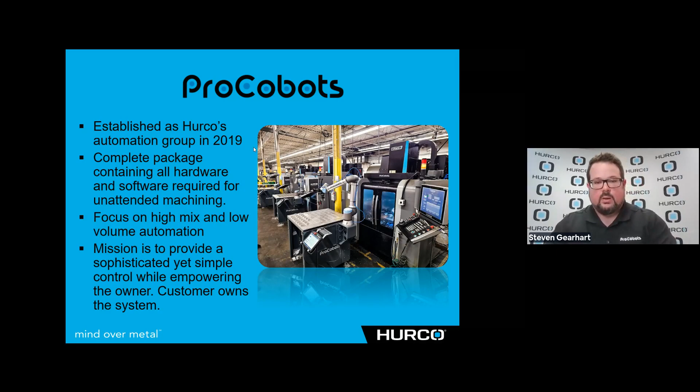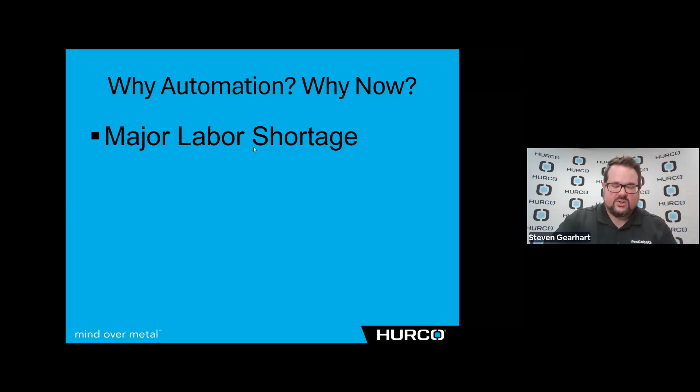So why automation? Why now? There is a major labor shortage out there. I'm sure a lot of you are aware it's really hard to find good quality workers, especially in small machine shops, especially out in the middle of nowhere. It's hard to find good workers. So we have the major labor shortage, and then right now the technology is ripe for small scale automation. The hardware is there, the software, it's all coming together at a head.

In order for us to really automate parts that we weren't able to easily or efficiently automate 10 years ago, for instance. And that leads to job shops no longer being excluded from automation. This is all obtainable now. It's no longer just large scale manufacturing, automotive, things like that—the pole barns that are job shops can now have robots tending machines.

So the first thing I'm going to focus on is the labor shortage. This slide just shows the worker pool, the population being from 16 to 64. This really just shows how in the last 70 years or so—45 years or so—there's been a labor surplus. Fast forward to today and in the future, we're really starting to see a decline in that availability of workforce, and there's no end in sight for that, to be honest.

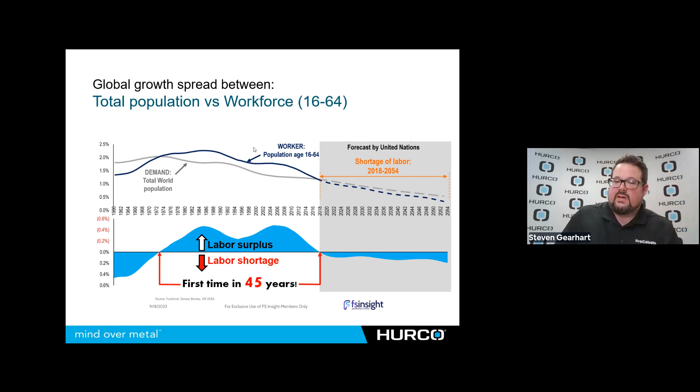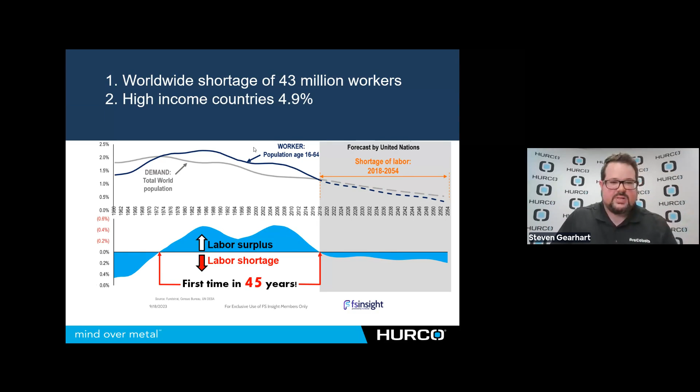So, like I said, first time in 45 years, there's been a global labor shortage. This is a worldwide picture: 43 million workers short. But high income countries like the United States are actually much worse off. If you look at this graph, globally we bottom out at 0.4%, but the United States is more like 4.9%. The exceptions are Africa and India, which level out this graph, where it should be a lot more extreme in places like the United States. So the takeaway is that automation is now driven by the labor shortage, not necessarily just trying to be more productive or cost containment.

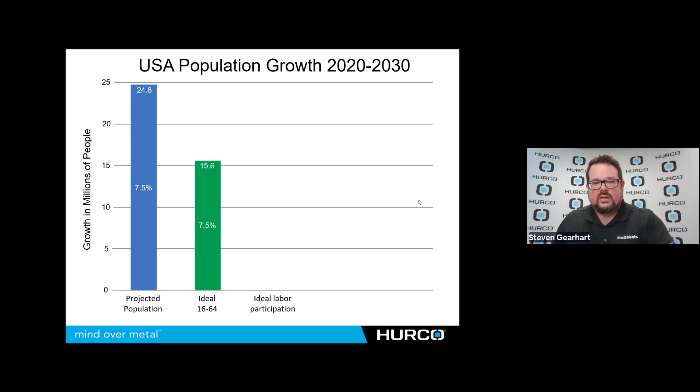This graph shows an expected 7.5% population growth between now and 2030. The ideal supporting workforce pool for that is 15 million, and 63% of that is the ideal participation rate, since not everybody available to work actually will. But here's reality: the projected pool of that 16 to 64 age group only grows 1.2%, and 63% of that projected to participate is only 1.6 million. So there's a shortage of 8.3 million people to support the population growth.

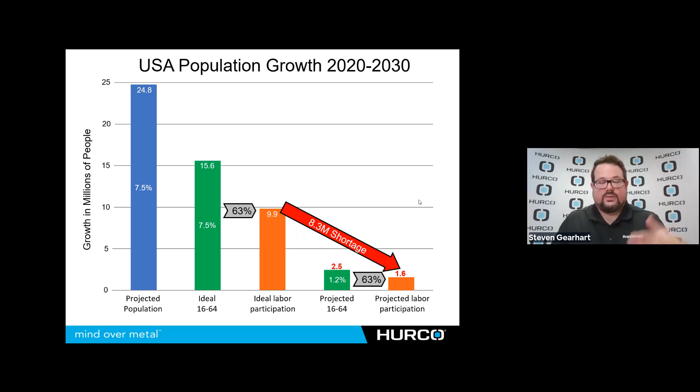So that's where robots come into play. So what is a cobot? A cobot is a type of industrial robot that is designed to work around humans, assist with tasks, be easy to program, flexible, and safe. Unlike traditional industrial robots, cobots are intended for human to robot interaction, making them ideal for small businesses with varied needs.

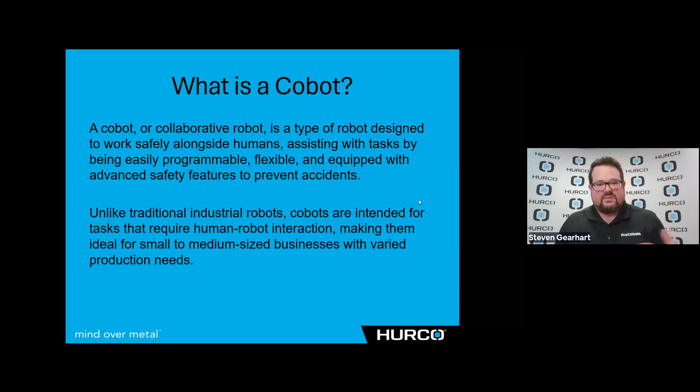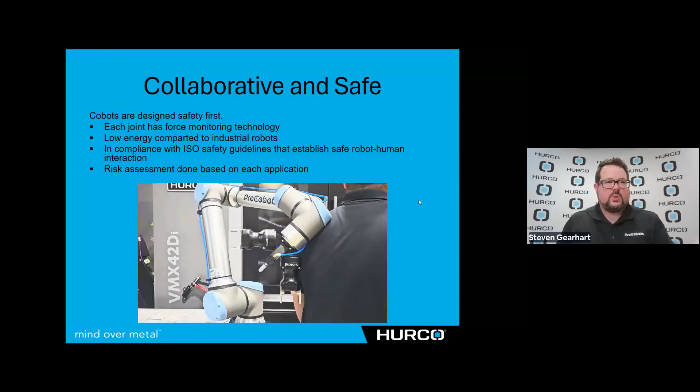So there's a video of me getting bumped by one of these robots. They're designed with safety first. Each joint has force monitoring technologies, and they're low energy compared to traditional industrial robots. They're in compliance with ISO standards and things like that. We do a risk assessment on every installation based on the application, depending on the part being held and other considerations. Obviously, if the cobot's wielding knives, we have to think a bit differently. But generally these things don't require area scanners or fences, which helps keep their footprint really small.

So just a quick comparison between cobots and industrial robots. I'd say they're both kind of industrial because they both have a place in industrial environments. A better way to compare them is that one is for high mix, being the cobot, and one is for low mix, being industrial. For flexibility, the cobot is really easy to use, whereas the industrial robot is highly specialized, designed for a specific task and purpose, doing the same thing over and over, a million times a year.

And like I said before, we're safe and approachable with the cobot. Industrial robots, not so much; you have to be a lot more cautious and guarded. The upside is that industrial robots are extremely fast, with higher payload. But with what we're doing with machine shop and machine tending, we're able to get away with less speed because most of the time the robot is just sitting there while the machine does the work.

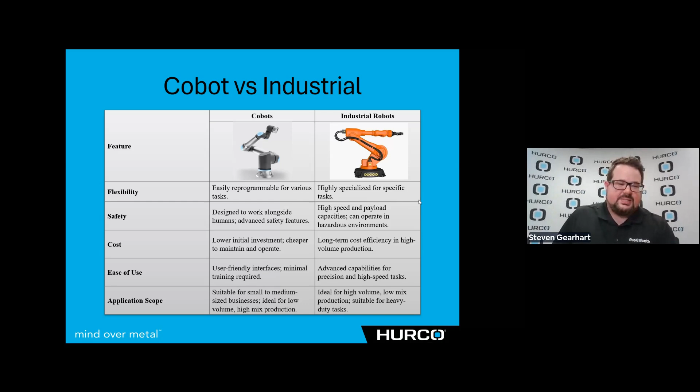We also have a lower initial investment with cobots, with quick setup times, which is really what we focus on. Whereas industrial robots are about long-term cost efficiency - you set it up and don't touch it for months or years as it does the same thing over and over. So you can calculate ROI with the cobot, and it pays for itself within the first year, especially with our systems. That's what we've really seen. And with the application, they're easy to use - it's really high mix versus low volume.

So back to these questions - second point, the technology is ripe for small scale automation.

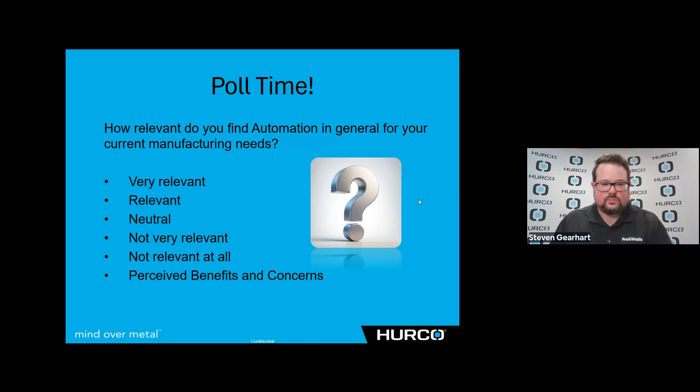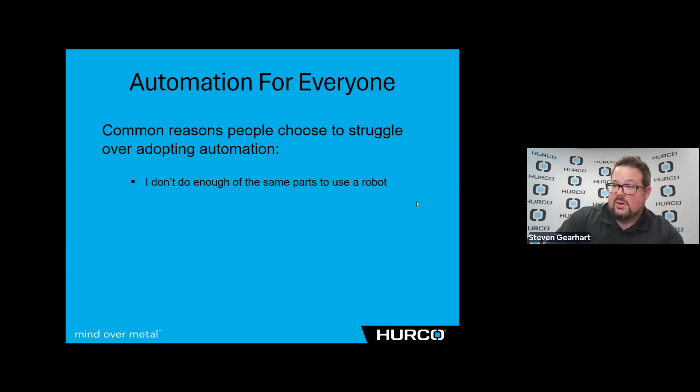Depending on your answers here, you may be asking yourself some of these questions. I hear a lot of common reasons why people choose to struggle over adopting automation. Some say, I don't do enough of the same parts to use a robot - and that's probably the biggest one. Traditionally, that would be true. With industrial automation, it takes a long time to set up, lots of money, lots of specialized programming, things like that.

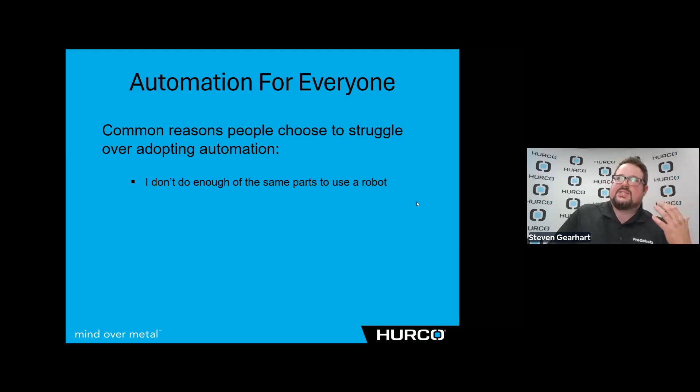What we focus on is really quick changeover. It's really easy to set up these robots now, to the point where in less than 5 minutes you can set up a part you've never automated before and have the robot at the machine. So now you have these small 1 to 2 hour batch sizes that are obtainable for automation. It's so easy to set up that those couple hour run times are worth the effort.

People say there isn't place in their shop for a robot cell. Traditional robots are huge, or they can be - taking up a lot of space with area scanners needing 3 meters of dead space around it, safety guarding, things like that. With the Cobot, because it doesn't need all of that, our compact table is about a meter square of space. So really, if you have room for an operator, you have room for one of these robots and the parts.

Can't afford to dedicate a machine to automation - I understand that completely too. That's what we've done with our system. I think most systems should have casters on the thing so you can move it from one machine to another. A big part of that for us is we have a quick connect to connect the robot to the machine, as I'll show you. That's really important because we want the system to be flexible. Maybe this machine is a 5-axis machine with a big part that isn't really robot friendly, and you want to run it manually. Instead of the robot just sitting there, you can roll it to a different CNC machine or out of the way to make it flexible. We really focus on that.

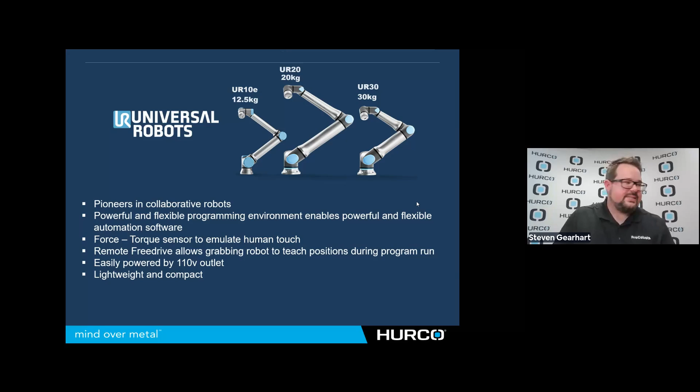So first we got to think about a robot. When we do automation, the first thing is the robot. We use universal robots for lots of reasons. They have a range of payload capacities now from 12.5 kilograms all the way up to 30, so we can lift a range of parts, large parts. They're the pioneers in collaborative robots. They have a wonderful programming environment which allowed us to make really powerful and flexible software. The force torque sensor at the end of the UR emulates the human touch, and there's no other robot out there quite like that. We can use this remote free drive that allows us to grab the robot and show it where to place the part - I have some examples of that to show you soon. It's easily powered just by a wall outlet, lightweight, compact. So they've been a great partner for us.

Next, where are we going to put the robot? We have these tables that we put the robot on. It allows us to present the parts in a nice, orderly fashion. We have 2 models that we really focus on for our machine tending application - we have the flat tray, which allows us to stack parts.

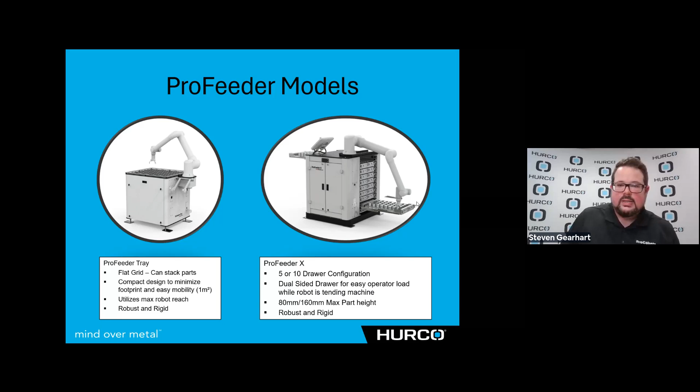Compact design, about 1 meter square, and it utilizes that robot reach so we get the most out of our work envelope. Then we have our drawer system for taller parts, or parts where you want high capacity but can't stack them. We can configure these between 5 and 10 drawers. They're dual-sided openings, meaning the robot can have 1 drawer open tending to the machine while the other 9 are available for the operator to load and unload. Depending on configuration, we can do parts 80 to 160 millimeters tall, and both of these are robust and rigid.

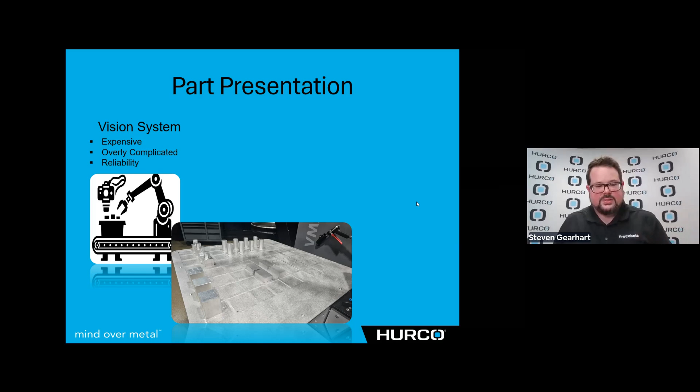So then we got to focus on part presentation. There's a lot of buzz about vision systems, and they've come a long way in the last couple of years, but it's kind of overkill for what we're doing. It's expensive, overly complicated, and as far as picking up a pool of different size parts, you can have issues with reliability when it comes to machine tending. So we don't go with vision.

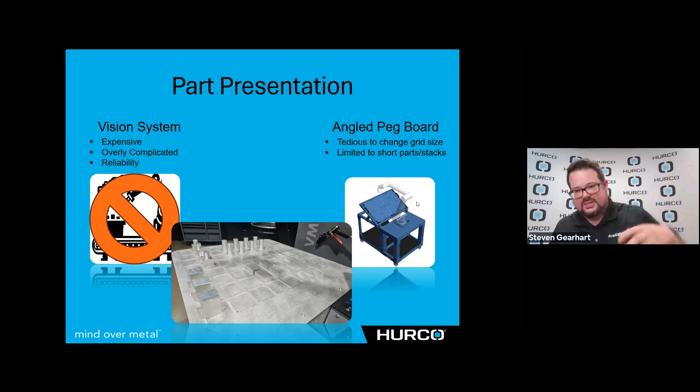Angled pegboards are a great solution as well, but I think they're tedious to change the grid size for different size parts, and you're limited to short parts, short stacks because of the angle. So we focus just on a flat grid, so we can quickly swap out those grids to have different size pockets for different size parts. It's simple and straightforward, and we can actually stack a large amount of parts with these, covering a large range of part sizes and heights.

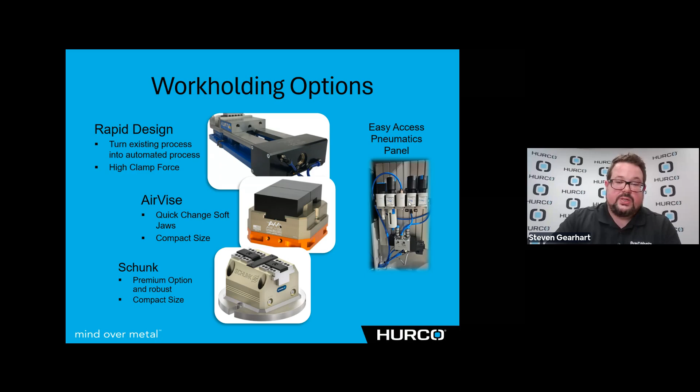We love using those. Then we have AirVise and Schunk for the smaller, compact soft jaws and hard jaws work holding. And we also have our pneumatics panel on the ProFeeder for ease of access to adjust the regulators, pressures, and things like that.

So then dual gripper options. We focus on the adaptive gripper from Robotiq, and then also pneumatic, using Schunk for that, and they both have their place. The adaptive gripper is really about, if you can use it, it's great because you have that programmable stroke, allowing you to pick up a range of parts.

So what I mean is you can have a range of parts, let's say a 1-inch part and a 3-inch part. Thanks to our software, you can queue and load those jobs to run back-to-back lights out, so it'll run 50 of part 1 and then 50 of part 2. With the adaptive gripper, you're able to pick up and adjust the fingers to different size parts, whereas with pneumatic, it's more either open or closed. You can have some positions programmed, but it's still kind of predetermined, and you can't just variably do it on the fly without some sort of manual interaction.

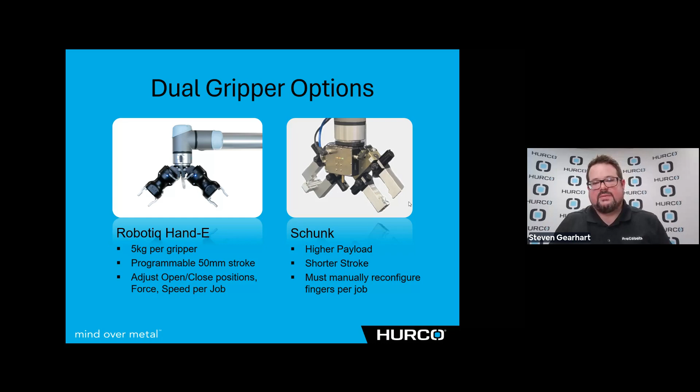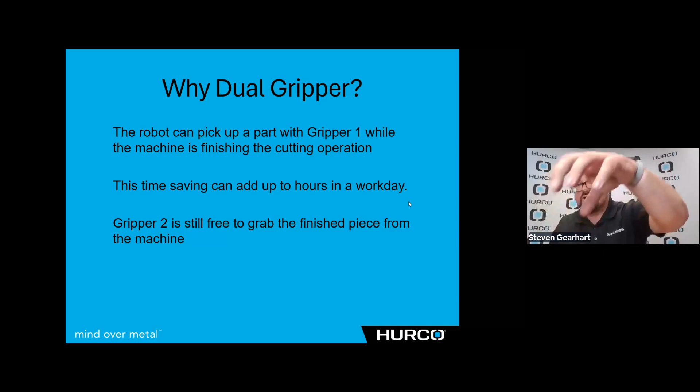So why dual gripper? We use dual gripper because it allows us to make the most of our time. The robot can pick up a part with gripper 1 while the machine is finishing the cutting, what we call staging, and that time savings can actually add up to hours in a workday. Gripper 2 is still free to grab that finished piece out of the machine, and then we do what we call an exchange, and then place part 1. This is much easier to do with an automatic door, so that gets me to our next slide.

Automatic door. There are a couple ways you can do the door opening. I've seen people use robots to open the door. While that's a way to do it...

Robots like consistency, and you get a lot of variation with the opening of the door. Also, if it's a dual door, that's not efficient either, and you can't open the door while the robot's in movement. So we save some time by doing that.

Then you have pneumatic, which isn't collaborative, and it doesn't allow the operator to manually open and close the door very easily. So we went with a collaborative servo-driven door. It can act like an elevator door—if it comes across something in the way, it doesn't hurt you. We actually have a switch too, so you can easily open and close the door. That's such a nice, convenient quality-of-life improvement for operators, that even in systems we don't necessarily automate, we still sell these auto doors just because they're so nice to have.

So like I said before, flexible automation—we've got to be sure that we can move this thing to a different machine or out of the way based on the dynamic needs of the shop. That's the thing about a job shop: you have multiple size parts coming in, it's never consistent, you never really know the workflow. So it's nice to have something adaptive that you can move from one machine to another. We achieve that by having casters on the ProFeeder and on the table to move it around.

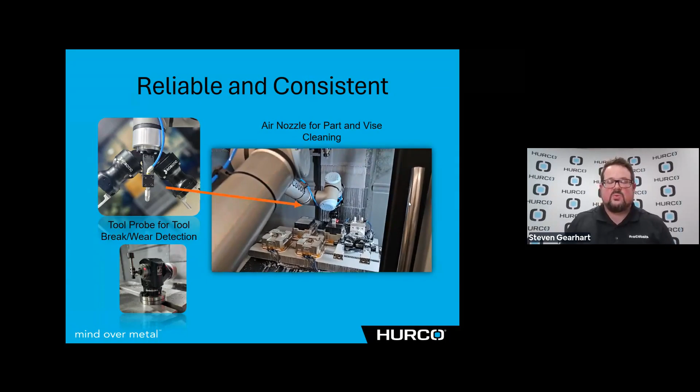Obviously, reliability and consistency is really important when it comes to automation. Without that, you can't ever trust the system to run while you're not around. So we have this air nozzle that will blow off the vise before it places a part in there, and also blows off the part as it retrieves it. As you'll see here in a minute, we also have a part flipper—it'll blow off that too, so we're not getting chips all over our parts and the work holding as we're doing things.

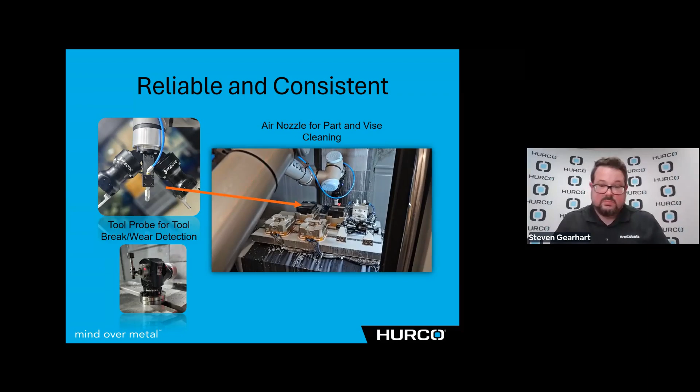We also recommend tool probing, just for tool breakage, wear, stuff like that. We've had customers do macros where every so many parts it will check your tools just to make sure everything's okay. Of course, the robot with that force torque sensor, as it goes to remove parts, will know if the machine threw a part. If it was expecting a large chunk of material to be removed and it wasn't, it's going to detect that. So that's also a benefit of the force torque sensor—we can feel for things inside the machine and kind of detect if something goes wrong.

You can also monitor this stuff. Hurco has the Extended Shop Floor package, which allows you to also monitor your automation. You can see a webcam view, we have the job manager screen there, and you can see that dual screen—the second screen where the automation software is running. On that screen, you can see the status of the robot, if it's running, how many parts you've run, and how many parts are left to run.

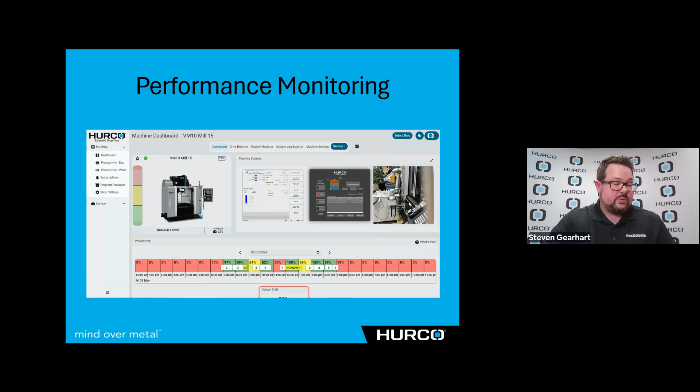And then, of course, you get this nice uptime percentage that shows you how efficient the machine has been throughout the day. We're also adding features to this ESF2 Extended Shop Floor to support automation and give you more data.

Then we have multi-op processing. This just takes op 1, puts it in a part flipper, flips it, and then puts it into either a second vise or a stepped vise or something like that to do the other side. It really just enables more lights-out machining, where you don't have to do all of op 1, have somebody manually flip it, then do all of op 2.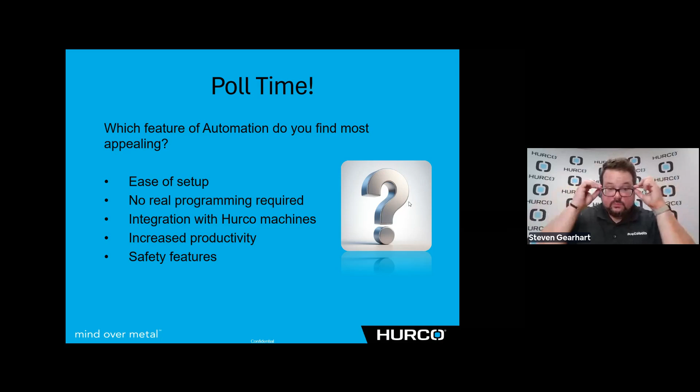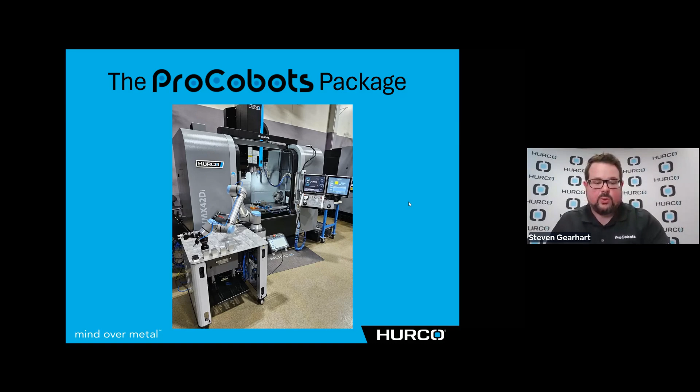So the ProCobots package, this is what we offer to address all of the things we talked about when it comes to automating a machine. So we have our robot. Like I said, we go with Universal Robots. We have our dual gripper setup, whether it be pneumatic or adaptive. Our table and part grid for the part presentation and a nice rigid body for the robot. We have our air nozzle for the part cleaning, and our collaborative automatic door.

And then our special sauce, personally, is the automation software that ties everything together. And then our work holding inside the machine and the retractable wheels to move that around, which I don't think I really talked about.

So they are retractable, meaning there's this little ratchet system. Let me go back in my slides here. So that ratchet thing there kind of moves the pad for the robot system to sit on up and down. So you just ratchet that pad up, then the casters are on the ground. You can roll the system around very easily. It's nice and fluid, and then once you get in position, you just ratchet that into place.

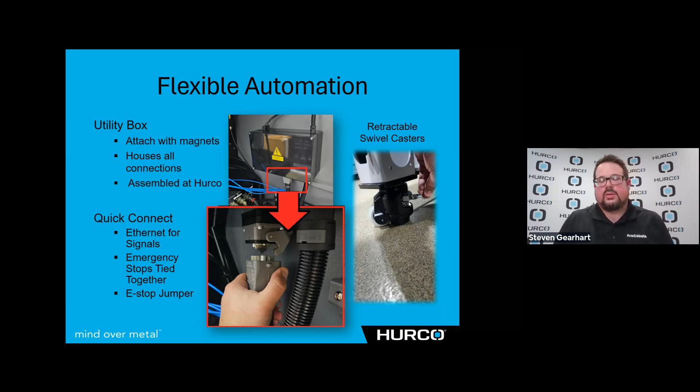And we don't have anything to lock the system to. There's nothing like a bracket or anything like that. And the reason why is what you'll see here in a little bit. It's so easy to reprogram how to load the part in and out of the machine that those things just overly complicate it. So yeah, let's jump back forward here.

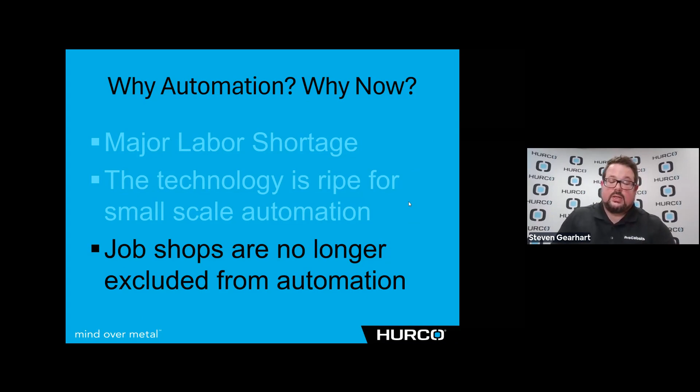So yep, our retractable wheels to move it back and forth between machines. So why automation again? Job shops are no longer excluded from automation, and that's because we have all of these things coming to a head.

So that's great, you have this system, you have all this equipment. Now what? So traditionally, there's this complicated teach pendant. It looks scary, and if you misprogram it, it'll Hulk smash into the table and it's a mess. So you hire an integrator to do all the programming, and it takes a lot of time and sounds expensive.

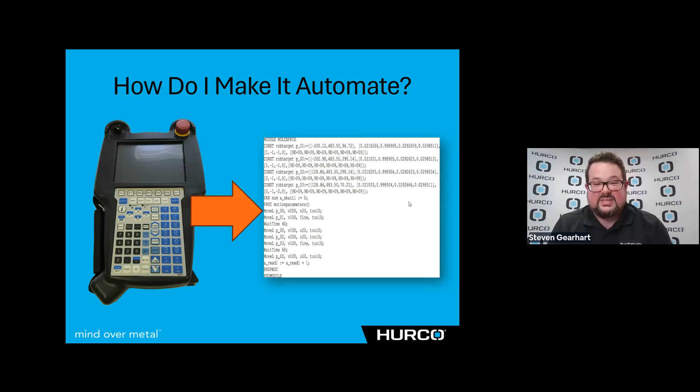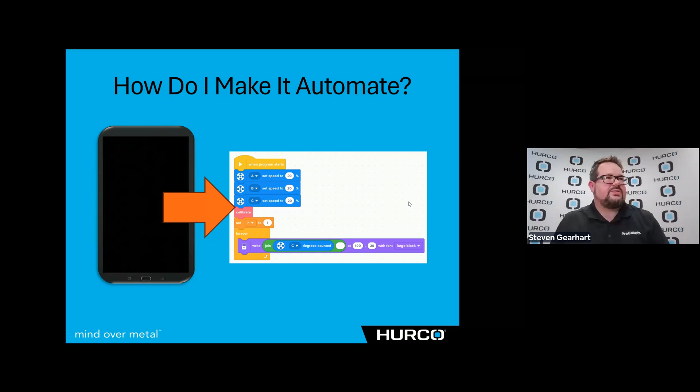So now these new robots have this nice teach pendant that's like a tablet. The code is kind of friendly, drag and drop puzzles, and it's really easy to use, but it's still programming. So you still have to do the if statements and the logic, flow of logic, variables, and all of that. And you still have to learn how to do all that and set it up for each job.

So it's time consuming. So we take that to the next step, and we have this nice job manager. This is our software that allows you to just enter parameters about a job and automate it. So no programming - I mean that. Like, you don't have to program the robot at all. You don't even have to touch the teach pendant. It's all done on the Hurco. You just give it information, and you do it all within less than 5 minutes on a new part, not just loading something you've done before. I mean, brand new part, set it up. I mean it, like, seriously. A lot of people say this, but we really mean it.

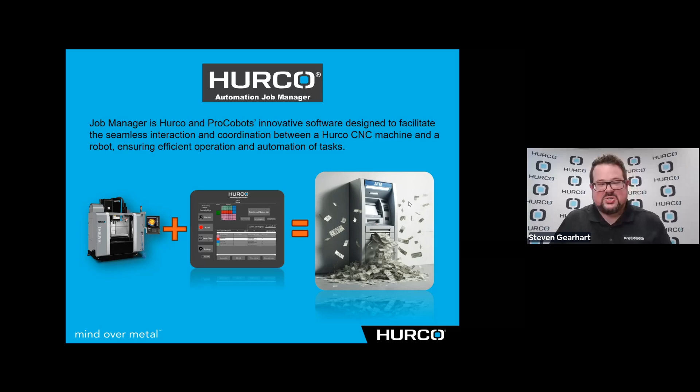So the job manager is our software designed to basically just do that interaction, that coordination between the CNC and the robot. And the picture is a bit dramatic, but seriously, it's that easy - you set it and forget it. I had a customer once tell me that they were all just sitting around drinking coffee after we did the installation, just watching the robot run.

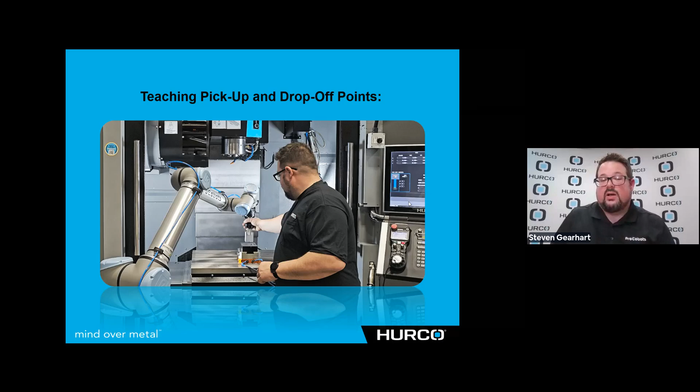So yeah, work order, job management - pretty much just enter all the data points to automate a part, and you just grab the robot, show it where to drop the part off inside of the machine. And then you can queue up multiple parts for lights out automation, thanks to the adaptive gripper having different stroke, having multiple work holding inside the machine. You can automate different size parts, doing different cutting programs, things like that.

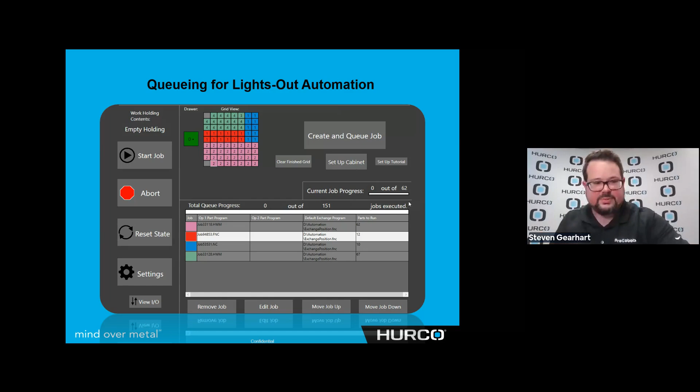So the first thing we would do is set up our grid, so we can easily change these grid trays like I mentioned before. In our software, you just enter the rows and columns and the grid size. You can save these, load them depending on the grid size, so you don't have to keep entering that information every time.

We have customers changing these out multiple times a day. The purpose is the different size grids allow you to run different size parts. It's a nice reference point to put the part in, so you have that consistent location, because once again, robots love consistency. A nice consistent location for the robot to pick up a part.

So like I said, a job in the scope of our job manager is a file that contains all of the data points to automate a part. That could be the location of the cutting program, whether it be NC or conversational, the location of what we call the exchange program.

That is a specific NC program that runs before every robot load and unload, and what that does is it just moves the table into position. It's a dedicated program that does that, so you do not have to modify your current cutting program. Traditionally you have to throw a bunch of M codes in there, positions, things like that. Not for us.

And then, of course, the XYZ coordinate of the part in the grid for the gripper to grab the part and place it back in there. And then where the parts are located in the grid, how many are stacked, special options that change the robot behavior, still taking that no-programming approach.

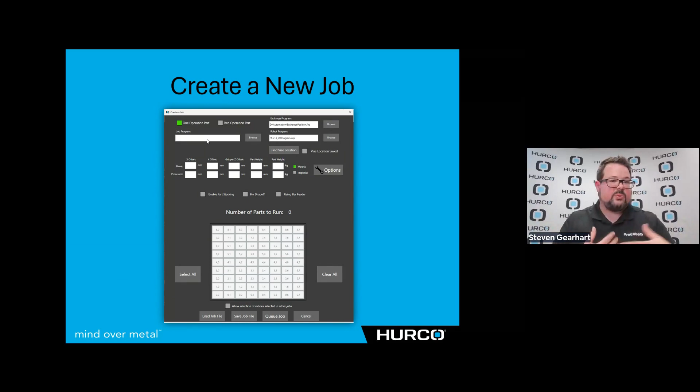So that exchange position program is already in place, same with the robot program. That's all standard. And so the next thing would be to enter the part dimensions.

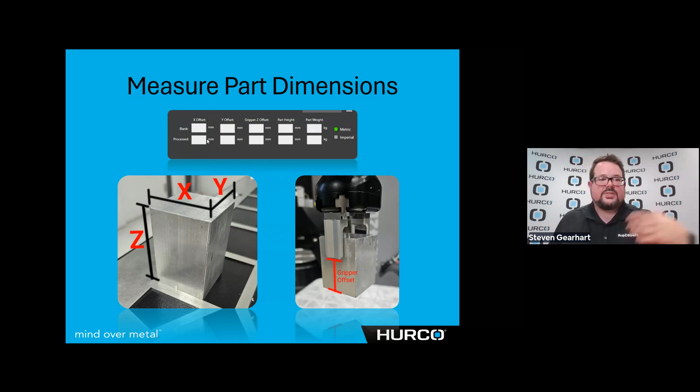It's as simple as just measuring the X, Y, Z, part height. We have the gripper offset, so how far it is away from the bottom of the part or where you want to grab it. So then once you fill that out, we go to our patent pending process.

This is really our special sauce here. Our two-step process to basically guide that robot into the machine, into the work holding, and it'll essentially use that force torque sensor in the UR to probe the center of the vise to have a nice, consistent drop-off point. So this is a video of us doing just that.

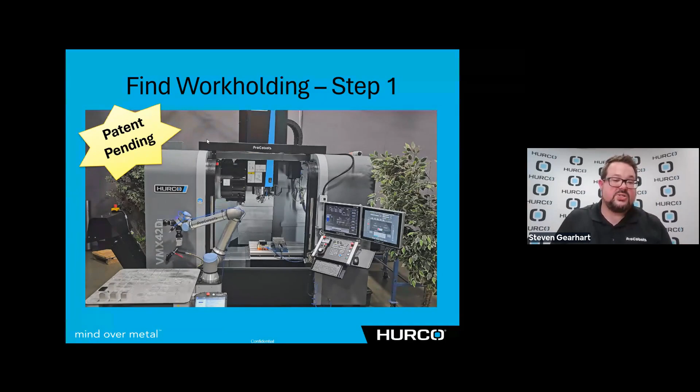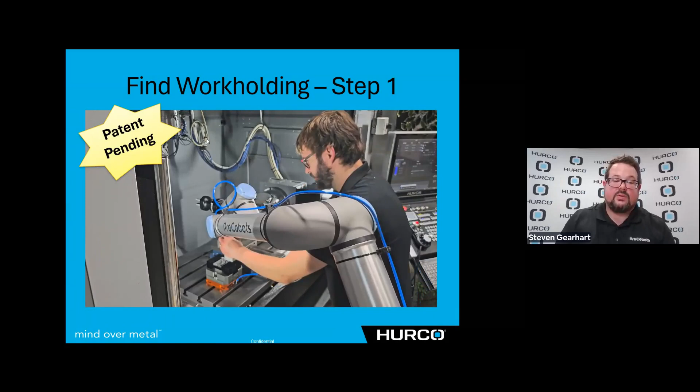So colleague Matt here has just pressed step 1. It's going to go and grab the part based off of the dimensions that I gave it. And once it goes inside the machine, it's going to go into what we call free drive mode. While the program's running, you can grab the robot and guide it with the part inside of the work holding.

And then once you're inside of the work holding, you hit continue there, and it's going to use that sensor to essentially probe the center of the vise. So it did a quick probe there just in case you have a dovetail, so it knows not to snag on it as it comes up. And then it does a more accurate probe here, back and forth, and then it stored that location.

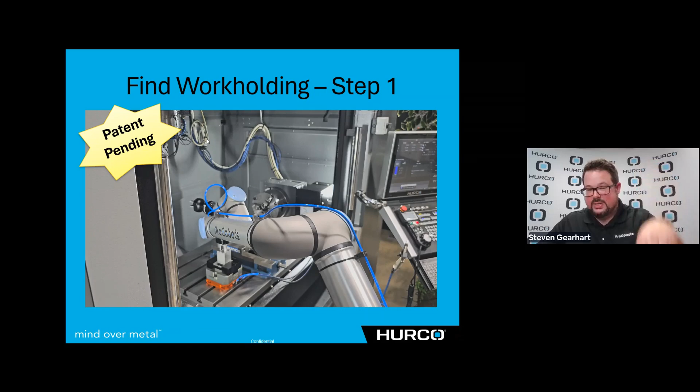Now it's going to do a test run. Just as it would inside the machine on a normal run, it's going to load the part, find that workpiece stop. And then we have a special option that we enabled that allows it to come up, close the fingers, and then press down with a force that can also be defined in the job manager as it clamps.

And there are different options for loading the part. You can have it clamp before the robot releases, or the robot releases and then the machine clamps, so the vise clamps down, things like that. Once again, all parameter based.

So then step 2, same deal. He's going to hit step 2 and the robot's going to move inside the machine. But ideally between step 1 and step 2, especially if you do not have a workpiece stop, you have to find your part 0, do your part setup, because the robot just put the part inside the machine exactly where it's going to place it every time.

So that's where you'd want to find your part zero. Ideally you have a finished piece inside of the work holding so you know where to grab it. Once again, we just guide the robot over the part where you want to grab it.

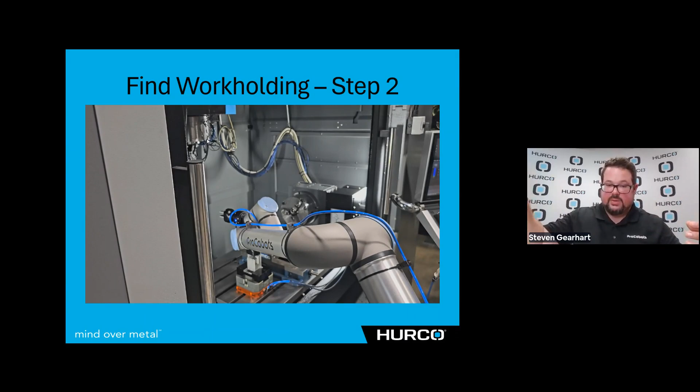Right now you'll see the robot jerk there. It's still in free drive, and he clamped on the machine there. He pressed the button to clamp the fingers, so it grabs the part and kind of centers the robot over the part. So it's consistent there, you don't have to eyeball it just right, it just centers over the part.

And then it drops the part off back into the grid based off those dimensions. And you'll see here as it slowly moves down, it's using that force torque sensor to gently place it.

So that's all it is. That's all it is to set up a new part.

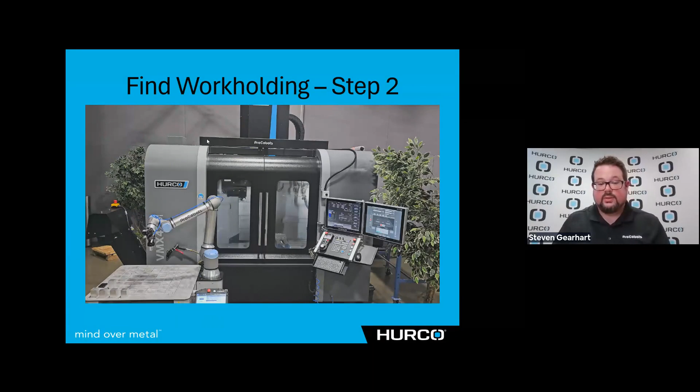We would then just tell it where those parts are. You can select them in any order. In this case, I'm just doing a straight across here. You can do a select all, of course, clear all. You can drag and drop to select. And this grid here just represents the table as if you were standing in front of it.

You can enable part stacking, dedicate an empty grid to drop off that first stack, and then tell it where you have parts stacked. You can stack multiple. So if your parts are nice and flat, you can stack as high as the gripper will allow you to, and have a remainder final stack.

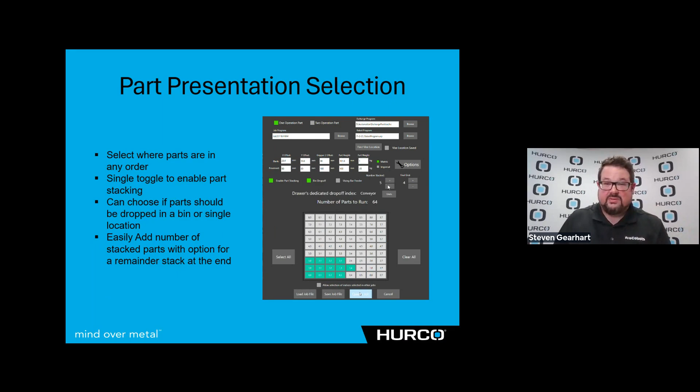If your parts allow for it, you can bin drop off too, so then you get the whole grid available, and you can just drop off into a single location in front of the table, onto a conveyor. I've even had someone drop into a vat of liquid to help clean the parts.

And then in the job manager there, it shows you how many parts you have stacked per grid. And as you queue them up, they'll all be different color coded, and it'll kind of look like a fun game of Minesweeper, if you remember what that was.

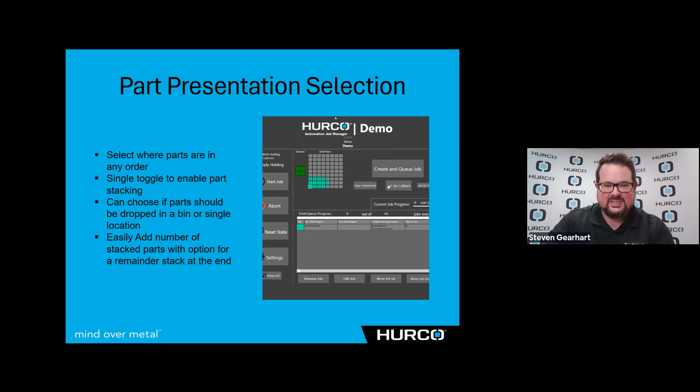So then the final step is just to run the job. Hitting that start job actually runs both the robot and the CNC operation. The job manager facilitates that communication, the sequence of events.

You don't have to do anything else. There's no starting on the teach pendant and then starting on the machine. You don't have to make sure the program's in memory on the machine, nothing like that. Hitting start job loads both programs, starts both programs, and facilitates that. And as it's finished, it'll load the next job in the queue if you have one.

So just to summarize, the advancement in this technology is what has allowed us to automate high mix, low volume. It's been beneficial, but now it's a growing necessity due to the workforce shortages.

And then our package includes everything you need to automate, from the robot to the software to the quick change peripherals, automatic door, and also training. And, of course, the Hurco support that people have grown to love.

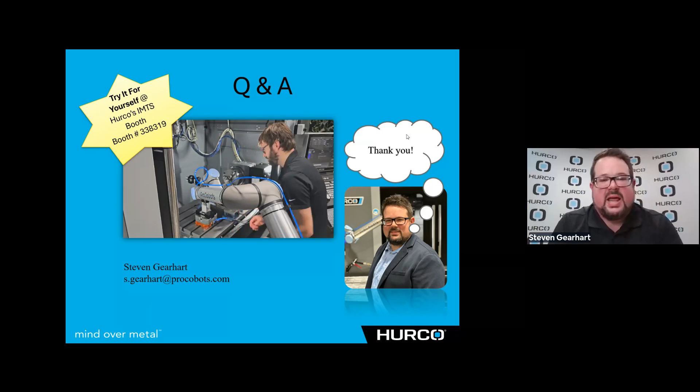If you don't have a Hurco machine, does it cost extra to get it set up? Once again, we go back to that partner - we only do it on Hurcos with our job manager. It wouldn't cost extra, I would say probably not at all, but you're going to lose a lot of the features. What we've done, we have patent pending and things like that, that's solely exclusive to the Hurco.

What types of parts and processes are best suited for automation with ProCobots? I would say all range of parts, within reason. With the UR now offering 30 kilograms, we can do some pretty large parts, and then with the 20 we have our big machines, we can automate those as well. So it really just comes down to finding the right finger, maybe doing some custom fingers for a part, but all parts I would say are within reason. As long as we need about 1/8 of an inch to grab onto it to accurately load inside the machine - that's the smallest. And then the largest is really limited by the 30 kilogram robot arm.

What is the max capacity of stock size you can use with the grid? So like the largest size, am I hearing that right? I think so. Yeah, so once again it comes down to any size. Like I said, you can make that grid a 1x1 and have it be the whole size of the grid. That's possible, it's dynamic. So you can change the rows and columns, the grid size - it does not matter.

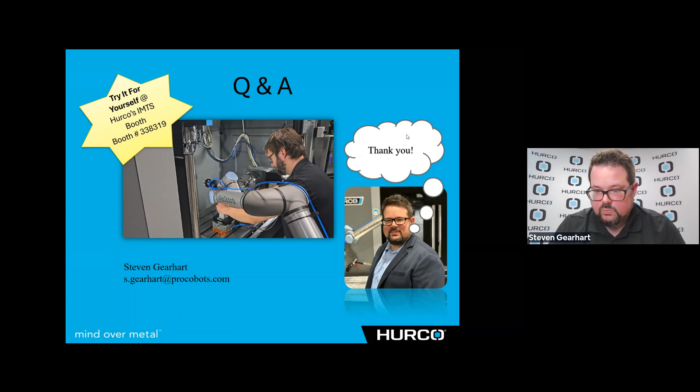Can I quickly jump in on clarifying the robot reach? The 1300 millimeter, about 51 inches, that is at full payload. You only actually lose payload when you're a few inches off the end of the arm, the TCP. So you don't lose any payload until that payload is about 4 to 6 inches away. So just to clarify, we do not lose payload at full reach of the robot. It all depends on when you're getting away from the tool flange. As your tool gets further and further away from the flange, that's when physics is not on your side. So yeah, that makes sense.

Does this integrate with part probing to stop production on non-conforming parts? It does, we've done that. We had a customer do probing on every part, and if they had 3 bad parts in a row - which was a variable they could change - the robot would take every bad part and place it into a bad parts container. And if there were 3 in a row, it would stop operations and send a message, actually send an email out to the person to let them know the operation had ceased.

At what point does it make sense to replace a 1-shift operator with a ProCobot? I wouldn't think of it as replacing an operator so much, unless the idea is it being an accessory or a tool to the workers you have. But really, if your machine is constantly getting fed work, if the machine's not down without work, then there's a place for a robot. The tedious loading and unloading of machines and loading programs, and of course if you're cutting something really hard and your tool life is variable, maybe there are some steps that have to be taken before automation. But really, if you're doing consistent work, robots love consistency. That's when automation really makes sense.

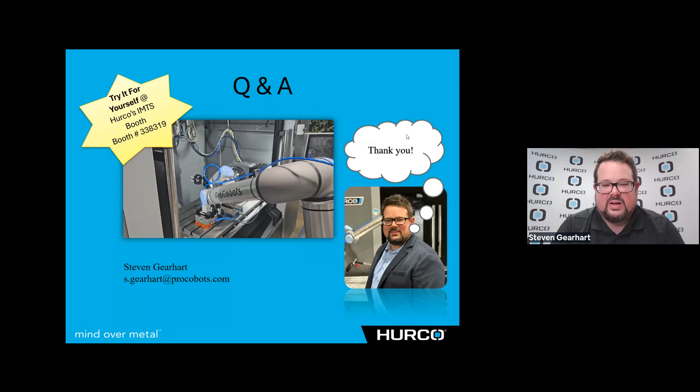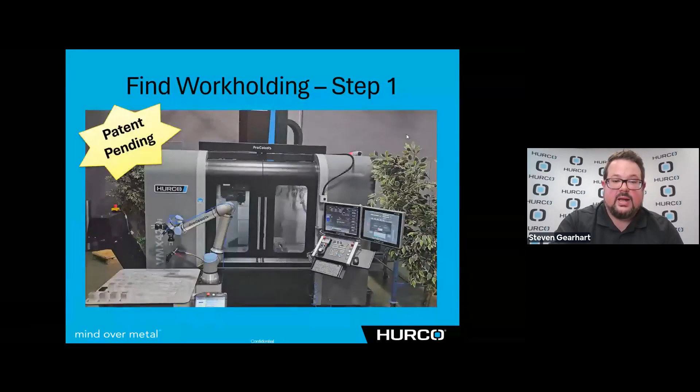What is the most efficient way to flip a part for first and second setup with a ProCobot? Like I showed you, I'll go back to this slide. The most efficient way to do it for us is a part flipper inside of the machine. Let me just play this video. This is really the most efficient way, it's inside of the machine. It can quickly load it in here, make sure it's nice and clean, do the flip. As you can see, this doesn't take but like 30 seconds to do the whole operation. That's the best way to do it.

That allows us to do multi-op processing. We even have it to where we have a customer doing 2 operations here, pushing it all back into the grid corner. And then after it's run that job, the next job in the queue then takes that and runs a 3rd operation. That's why there's 3 vises in here actually.

That's the most efficient way to do it. How accurate does the unit placement need to be in front of the machine? It doesn't have to be that accurate. We try to eyeball it nice and straight so the axes of the robot line up to the machine axes somewhat. But because it's so easy to set the position inside the machine, we don't have to really worry about being consistent. We've had people put some tape on the floor so they get it in the ballpark. I'm just showing where to place the part and remove it is all you have to do.

We have a couple of people asking if this system can be used with older Hurco models or only on newer generations of machines. So this setup here with the job manager is just on the I machines. I believe around 2014-ish or so, when we went to the darker gray skinned model with the I at the end of the machine name, that's compatible with the job manager.

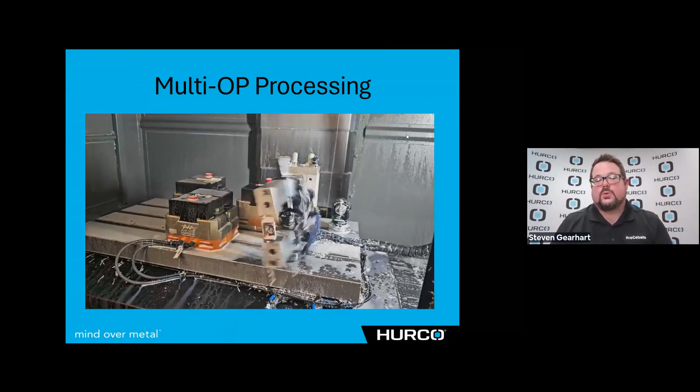Now, there was about a year or so period where we were still using the Max 4 controls on those I machines. Those can run the job manager, but we have to have a special tablet that we add on there to run the job manager, because the older Max 4 doesn't have the operating system compatible with the job manager. But we can do it all just the same. It works all the same.

And then before that, the older machines, as long as it's an ISA rack, if that means anything. I don't know the year generation, but I would say probably like 2009 and on or so, roughly. Don't hold me to that, but we can do more of a traditional integration that still offers an automation solution. You can't queue multiple jobs in a row with the job manager, but we can still automate a part, and we do more on the robot teach pendant to enter that data.

Do you have experience loading billet for Op1 into a 5-axis rotary and then moving the part into a vise for Op2 to finish? Yeah, so like with our SRT machines, you can have the 5-axis on the C table there. Of course, we can take that part out, just like with the part flipper, if there is no flip required. So if you can rotate, which in the SRT isn't really the case, we can still take the part out and place it into a different work holding. Whatever the type of machine, it doesn't matter. It would just be like this without the part flip, essentially.

I am bar feeding a twin spindle with a huge variety of work at low volume. I need an arm to manipulate my collets in the right spindle and unload parts. I also need a solution that can be moved away and reoriented globally, not by each program. Is this a viable solution? That's a bit loaded. Yeah, so I think first part, loading.

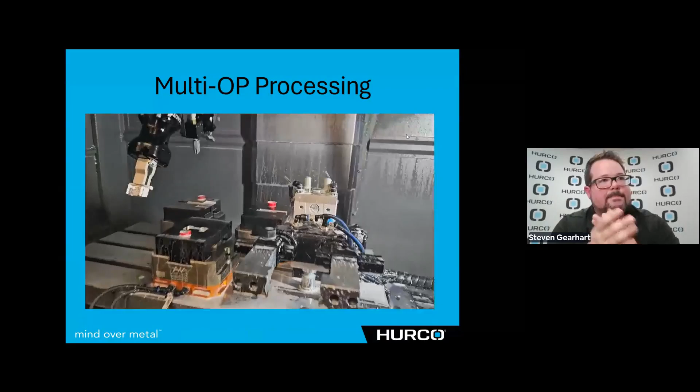So yes, bar feed, remove from the sub spindle. It mentioned the collet. We can remove parts from the sub, no problem. That's just a simple toggle where you're going to remove it.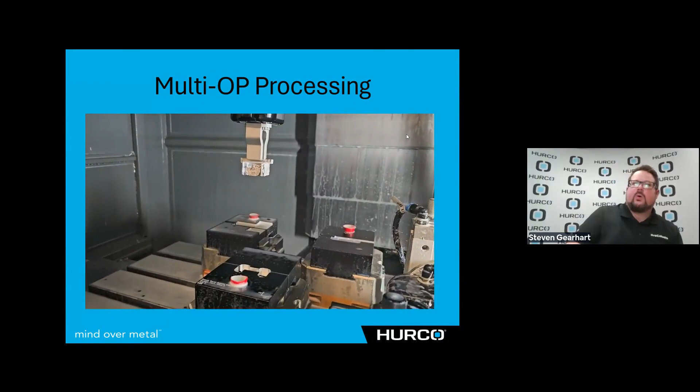Also, about the collet, if they actually want to remove the physical collet, that would take custom fingers, but also doable. He says if I move the robot away, when I bring it back, I need to relocate it once, which is then effective for all programs. I see.

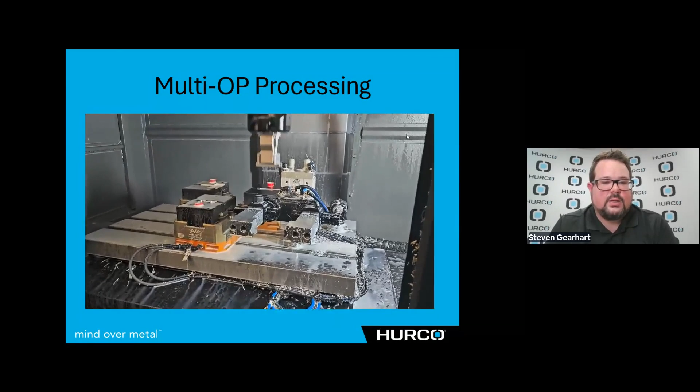That is not correct. It does have to be done for each program. Yeah, so there is not a global position for loading that carries for each job, because the job file itself contains the specific load and unload process. But I like where you're going with that, especially on the lathe where the Z center line doesn't change. That's something we may look into. I'm going to take note of that.

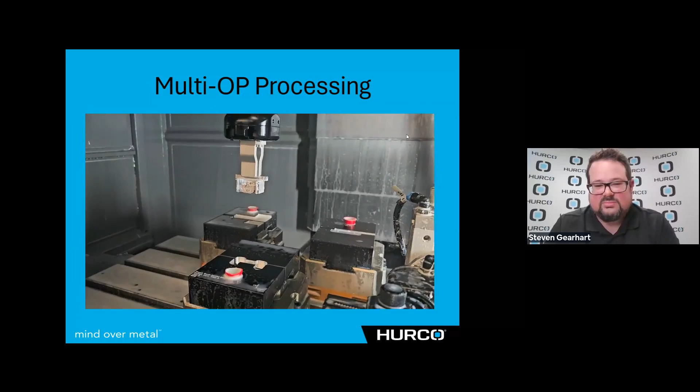All right, we have a couple of people asking if this robot can interface with multiple machines at one time, like in a cell.

No, we focus on one robot to one machine. We have done a special case where we had one robot between two CNCs loading side doors on each side, but that was a custom special case. I wouldn't say that's something we do consistently or offer as a solution. The main thing is, with the reach of the robot, you can't really get two machines that close together, and we don't do anything with a 7th axis rail back and forth or anything like that.

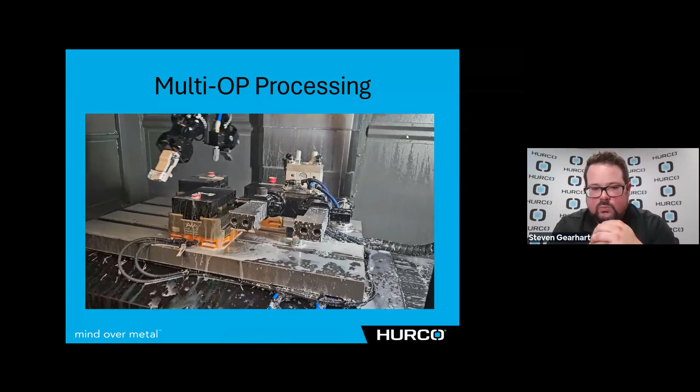What kind of maintenance is required for a ProCobot, and how frequently should it be performed? Really, the robot doesn't have any maintenance. There's nothing you have to oil or grease. These robots don't have batteries that you have to replace like some robots, so it's largely maintenance free, just keeping them clean. They're sometimes in pretty harsh environments inside machines. We've all been in machine shops, sometimes coolant can be left untreated and get kind of messy or dirty, so it's nice to keep the robot clean to prevent any gumminess and help increase its longevity. But that's pretty much it. UR does have a list of maintenance items just to make sure things are nice and tight, but as far as consumables or anything like that, there isn't anything.

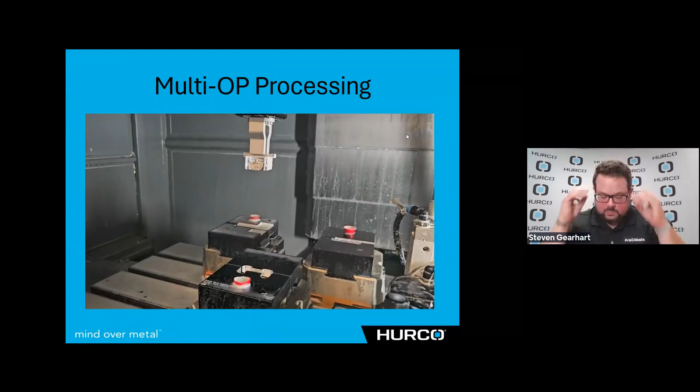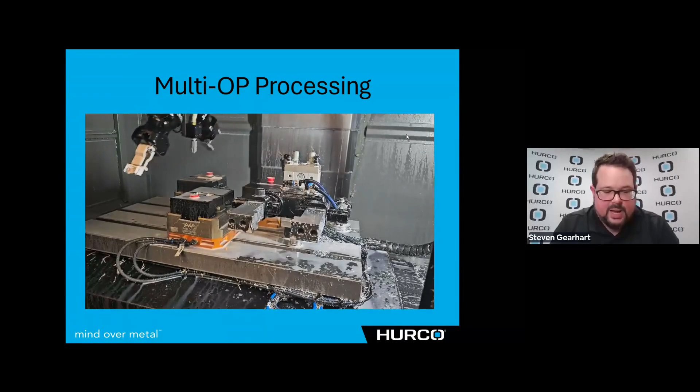How does the ProCobot handle complex part geometries or variations in part design? Having that adaptive gripper, especially with the Robotiq gripper, it can open a range to grab multiple different size parts. Having the dual gripper setup means you can have two different styles of fingers. Traditionally, we have gripper 1 do all of the loading and gripper 2 do all of the removing. But we've had lathe situations where gripper 1 does an ID grip to load and unload, and gripper 2 does the flip, using different style fingers. It's really about customizing the fingers and work holding to accommodate a range of parts and grips. Since we offer a whole package, when we look at a customer's application, we go through what the right fingers are, whether we manufacture them or the customer's job shop can make them. We don't charge for that; we just tell you what we're thinking and have you make them. It comes back to owning the system.

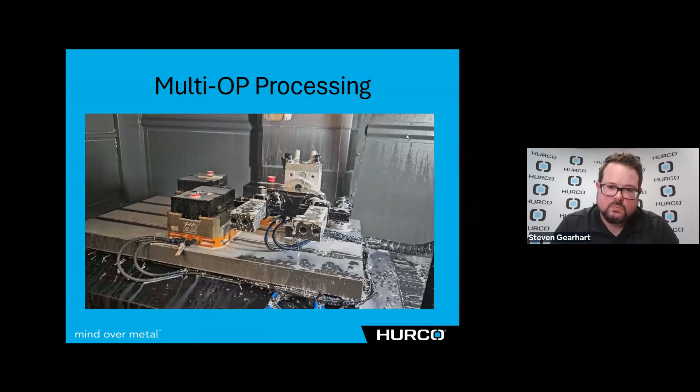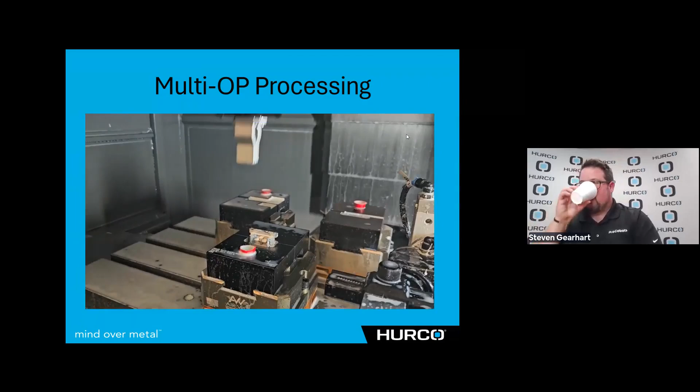We have a couple of people asking about cost. Do you mind ballparking a number for the audience? I'll give that to Ethan. Yeah, so we have a really competitive price in the market, especially for how robust our system is, and it's a full turnkey package. Most systems are different depending on the customer; some want multiple work holdings, a part flipper, all sorts of options, but most systems are well under six figures. We do have promotions and deals going on, especially heading into IMTS. So if you'd like a more exact quote, feel free to reach out to us. We can get you one or set you up with a Hurco distributor or one of our partners.

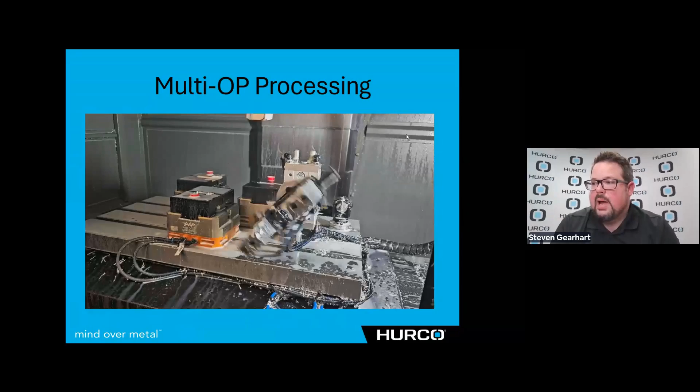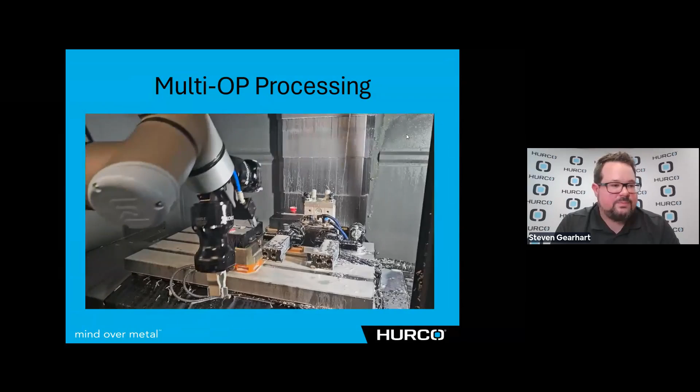What improvements in cycle times and productivity can be expected with ProCobots? It's really just about being consistent. Consistency is key. When you put a human next to a collaborative robot, as far as speed goes, the human's going to win every time. But it's all about that consistency. If you're three seconds faster than the robot but you go take a 20-minute bathroom break, you lose all of that. The robot is efficient and consistent with what it does, and that's where it wins. It can run lights out through breaks, holidays, weekends, overnight, things like that. So, like I said, consistency is king.